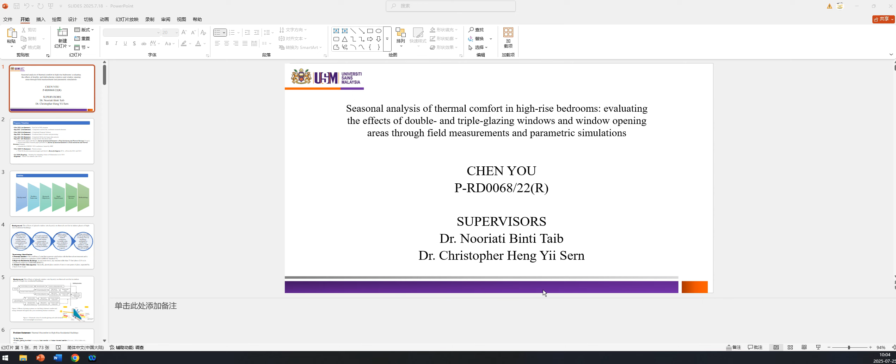Should I start with chapter one sequentially? What do you have today? Because the last time I requested, I want to see your results and analysis. Do you have that in your slides or not? Yes, I have all contents, chapter one to chapter five, in the slides. Okay. Maybe we can have a look at that. I think you amended a bit on your objective. Perhaps we can start from the objective then. The rest, I think we have to go through the thesis rather than the slides at this point.

Can we just look at your timeline at the moment? Can we go back? This is March 22 when you actually registered, right? Yeah. Okay. I think you're quite in good time. This is like your third year, right? It's my fourth year actually, seventh semester. Okay. Can you go next? Go to your revised objectives.

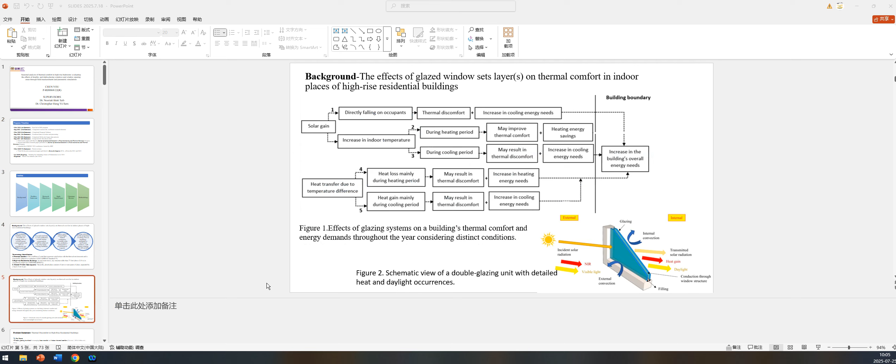First is to investigate the thermal comfort performance of different rooms, and the second one is to use simulation software to improve the multi-scenario thermal performance with window glazing type, shading coefficient and the window opening area. And the last one is to quantify the impact of the window opening area on the SHG and the CEV under different glazing window conditions.

Okay. I think that's quite clear. Dr. Chris, do you have any comment? I've gone through the objectives. I think it has been revised. I just have a question on the word empirical. I do not know if it is appropriate to use here. I was thinking to measure and compare instead of using empirical. I do not know whether this comment is legit or not.

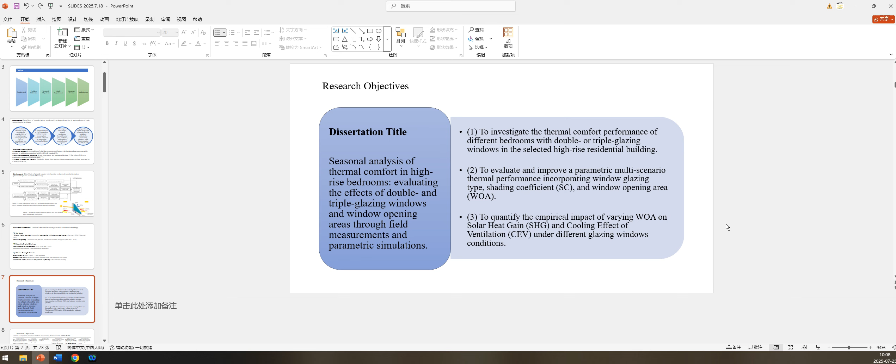The reading. Yeah, the reading. Yeah, the data for number three. Is it in percentage? It's reading, right? Yeah. Ah, okay. I think it's okay, Dr. Chris. This one to maintain. Yeah, okay, all right.

Okay, can we go to the next one? It's okay. I see this one. I think this is quite easy for us to understand. But I don't know whether you need both for research objective and research question. If we can have just one table to summarize this? Is that okay, Chen You?

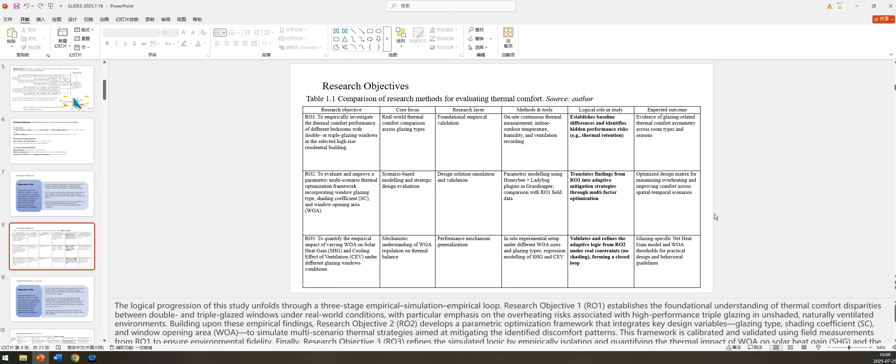Because there's not much difference, right? They're similar. Can we just simplify? Because usually we don't have it, but I can understand if you want to make it easy for the reader to understand your work, it's okay, but I don't think you need two tables to describe. Okay. All right. Can we go to the next one?

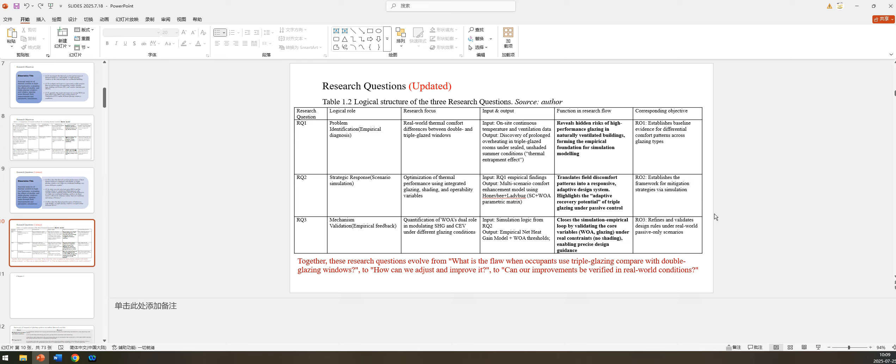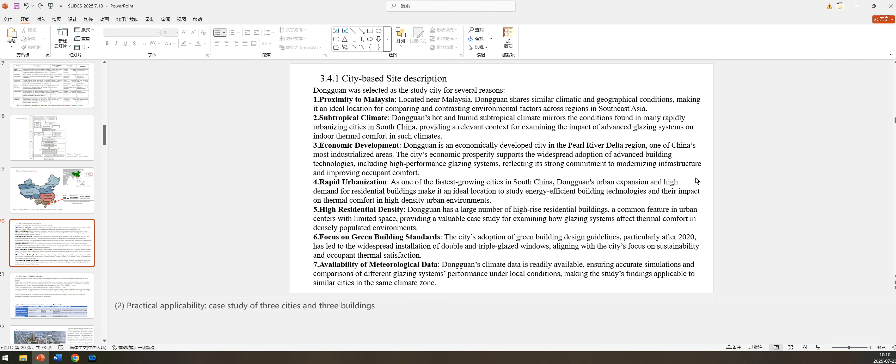Can you jump straight to method? We asked you, I recall, part of the method was to justify why you chose these seven locations. Are there any criteria or any components that you are referring to? I think you have it, but I'm not sure where exactly. Can we just discuss this? It's like reverse engineering, why these seven.

This is the criteria for building selection and this is the room justification. Seven rooms were selected from the high-rise building because they met these conditions, because of the different types and orientations. And in every room, or every house, they have to have different glazing types.

This one is not simulated, right? Is this for objective number one, number two, or number three? This is for the field measurements, objectives one and three. So it's not simulation, it is measured, right? Yes. Okay.

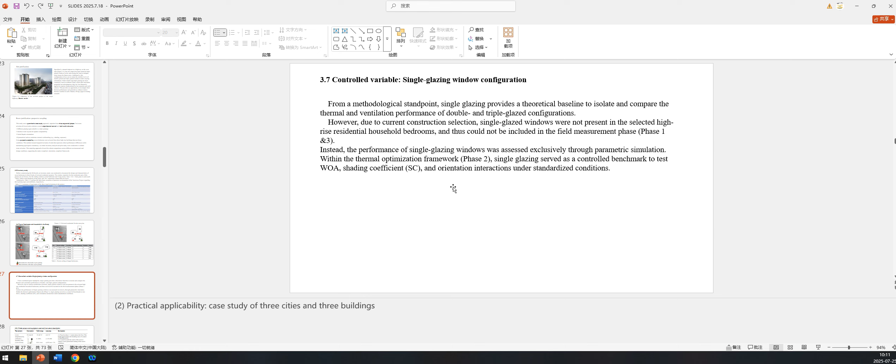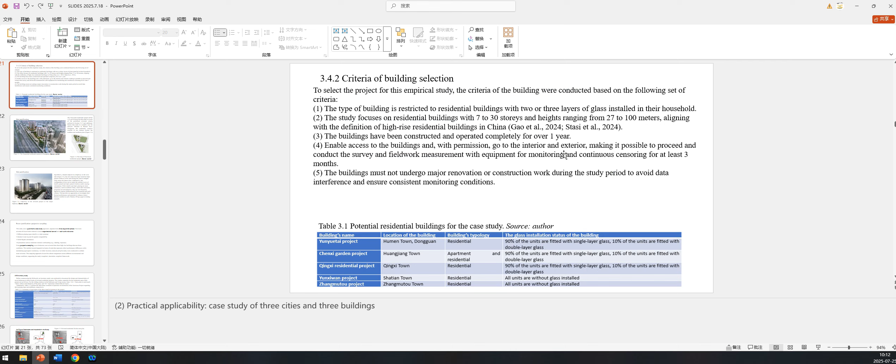It's kind of difficult. What I'm saying is, when I ask you for the criteria, can you just have it in one page? I know there's a lot to explain, but can you simplify it and summarize it first? Because looking at this, I'm not sure which is which. There's so many things going on here.

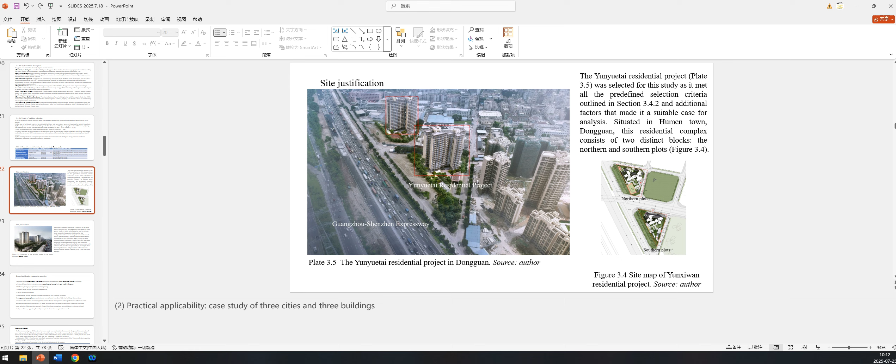The scope is from the city to the building and then to the room, from the big and narrowing down to the room. So I will simplify this justification in one page. Okay. When you present, it's very important. Varied facade orientation.

When you say varied facade orientation, which orientation are you choosing? It's random. Can you explain that? The orientation, these two are the same orientation, south orientation, and this one is for the east and northern orientation.

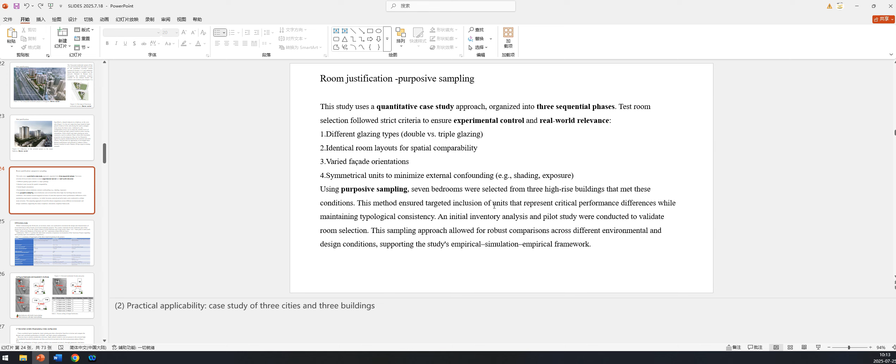What I'm saying is, when you go back to the page just now, you might want to detail it out in that sentence. When you say varied facade orientation, just have it in a column: Roman number one, east facade, Roman number two, west facade. So we know how many facades and orientations are involved. Can you understand? Yes, I have mentioned it in my manuscript.

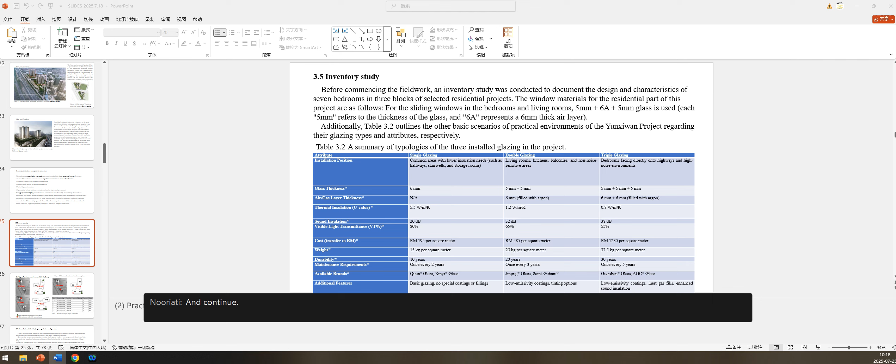Sorry, okay, doctor. Chenyu, okay, you can continue. Okay, sorry, I had a visitor just now in my room.

So last meeting I was advised to introduce control variables, so this time I added the single glazing configuration as a control variable, single glazing compared to the triple and the double. However, due to the current construction selection, single glazing is not present in the selected bedrooms, and thus couldn't be included in the field measurement phase.

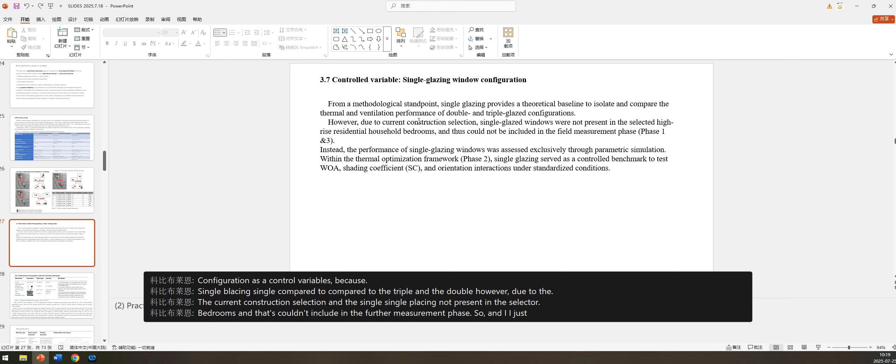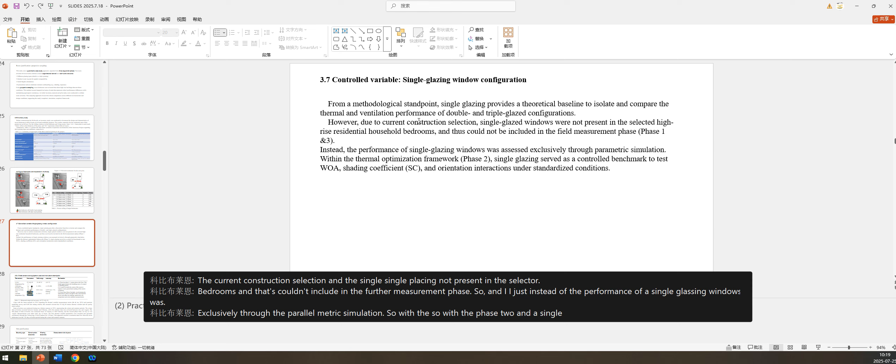So instead, the performance of single glazing windows was assessed exclusively through the parametric simulation. So in phase two, single glazing serves as a control benchmark to test the open area, SC and orientation under the different conditions.

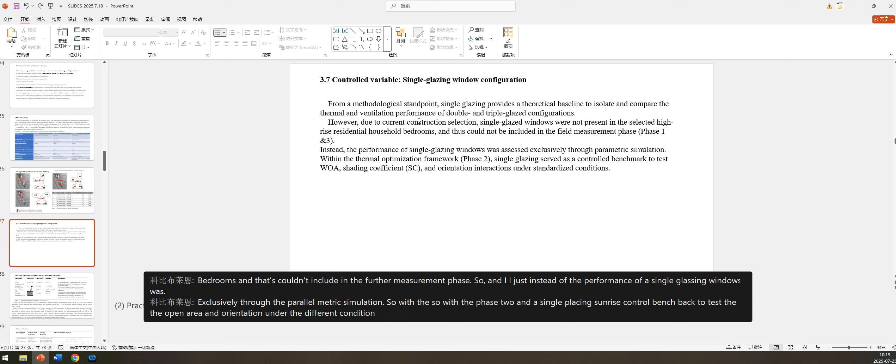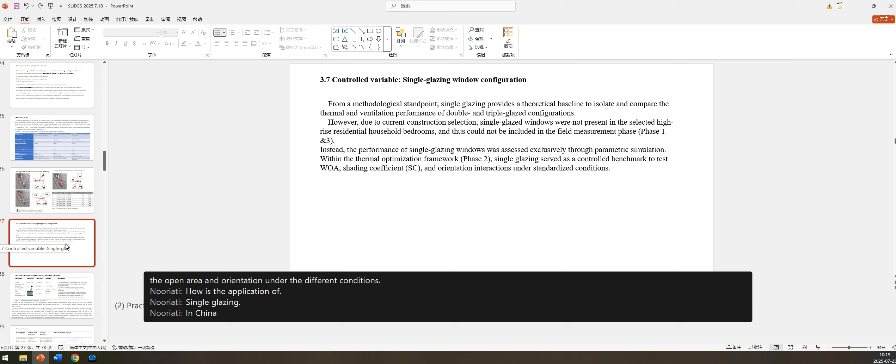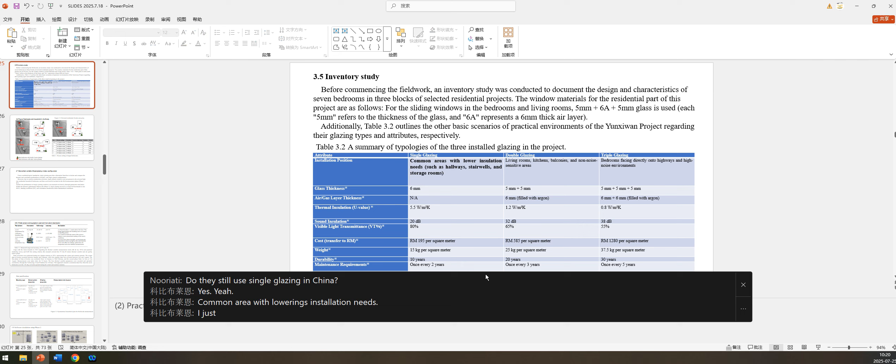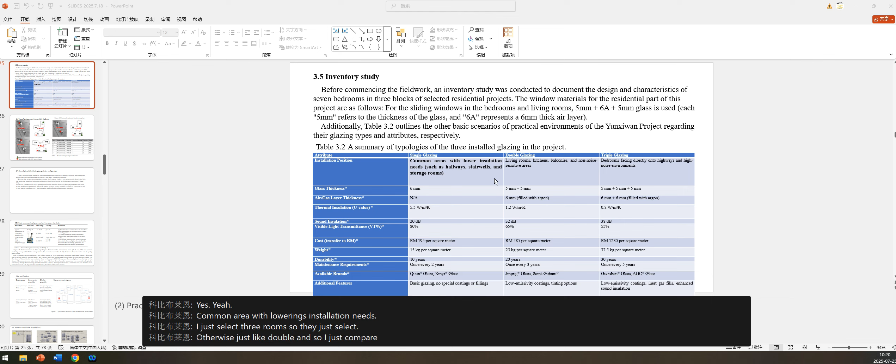How is the application of single glazing in China? Because I know the seasons are different from here. Do they still use single glazing in China? Common, yeah, single is common in common areas with lower insulation needs. But I just selected three bedrooms, so they just select advanced glazing, like double and triple glazing. So I just compare the single glazing with simulation. So that's the way it goes.

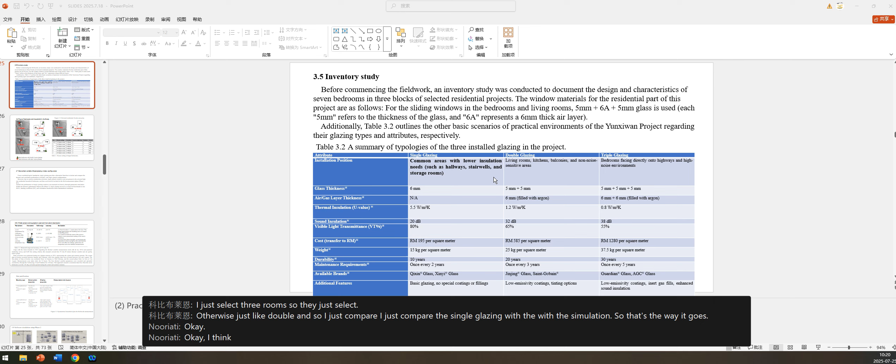Okay. I think can we move to the next one? Go to your results. Chen Yu, it's important during the Viva later when you talk about your method, it has to be clear on the steps, the step by step that you actually do. Like here in this case, your objective number one, is it through literature or did you measure for number one?

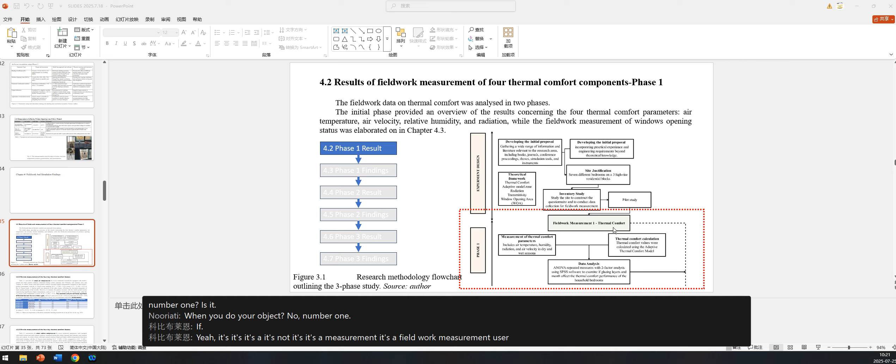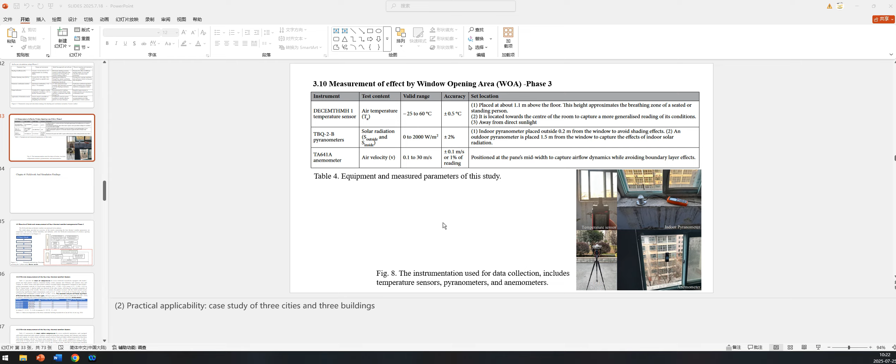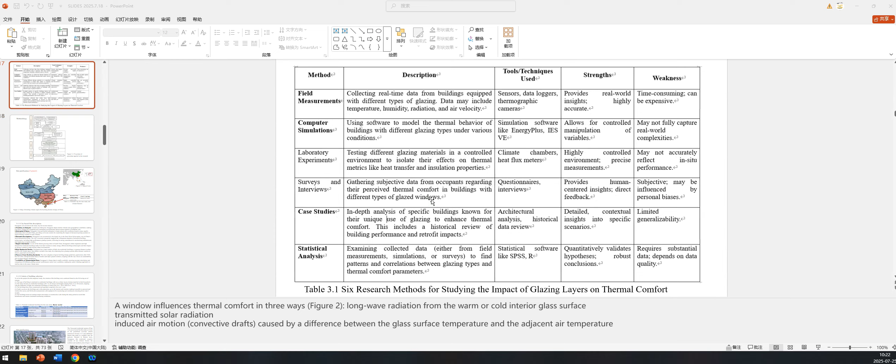Do you have that in your slide for research method, like a step by step? Yes, I have. Okay, can you zoom in a bit? Okay, this is a sort of flow chart of the research. For example, your phase one: measurement of thermal comfort parameter, thermal comfort calculation, data analysis. It does not show clearly the procedures. Do you understand what I meant by procedures?

Means like what are the tools involved, and if you are taking a certain measurement, how many times do you take it? So I have to check in your thesis whether that is included. Those processes are very important. This figure 3.1 is just to understand your flow chart of the three-phase study. When I talk about research method, for each phase we need to be clear on the processes. Do you understand? Yes, yes. So it needs more details.

Drawn out clearly. You have those probes and whatnot, but because you have three phases, there are many things you are doing at one time, so it has to be clear. Probably divide into phase one, what are the steps, phase two, and then phase three. I think the writing is here, but when you present, you don't have a long time, it's a very short window. So you need to be able to simplify the processes.

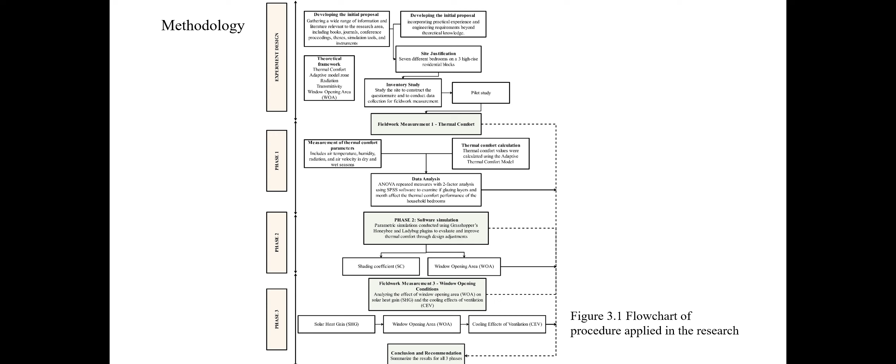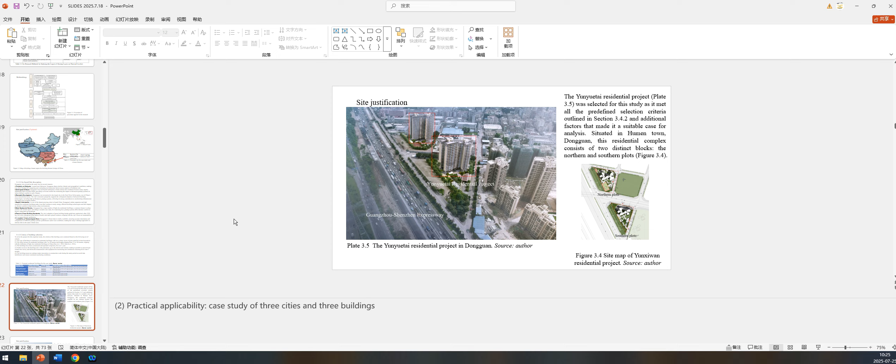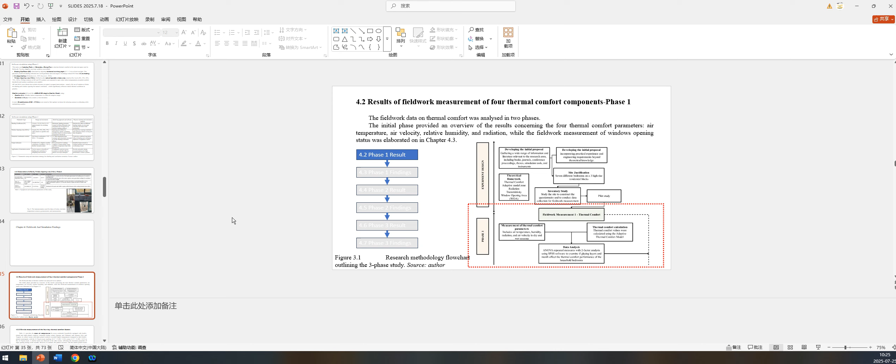I don't want to talk much about that this time, because what I want to see today is your results and findings, since we have not come to the stage where you present them. So I believe you should look at the method points I mentioned. Now can we go to results and findings? You can present them. I was just scrolling your method. Your method is very long. How many pages is your method?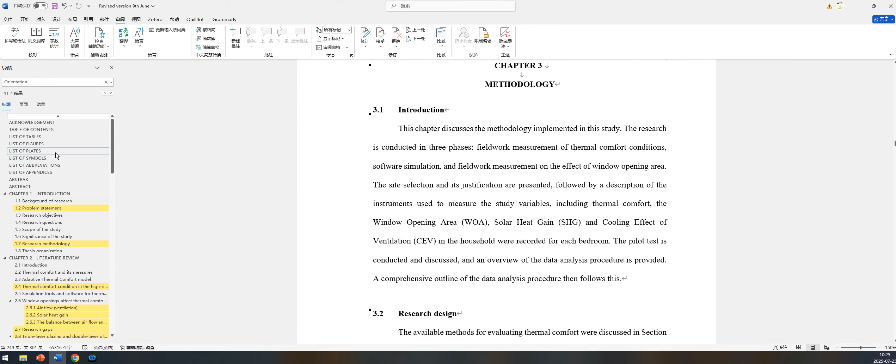I will count about how. Yeah, it's a lot. It's a lot. I think it is very much. I've been scrolling and haven't stopped scrolling. Okay, so you must be able to simplify.

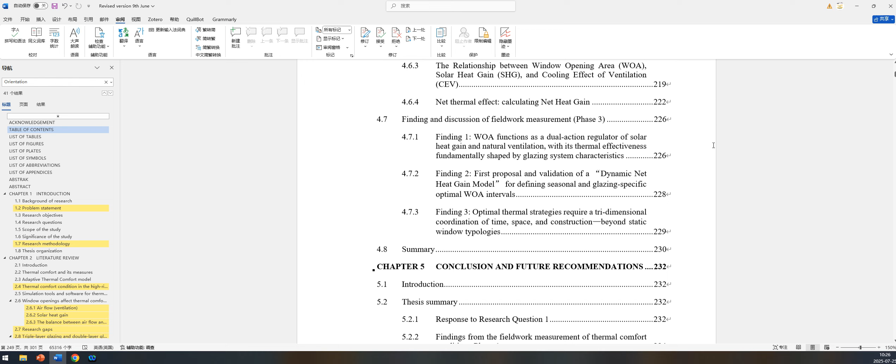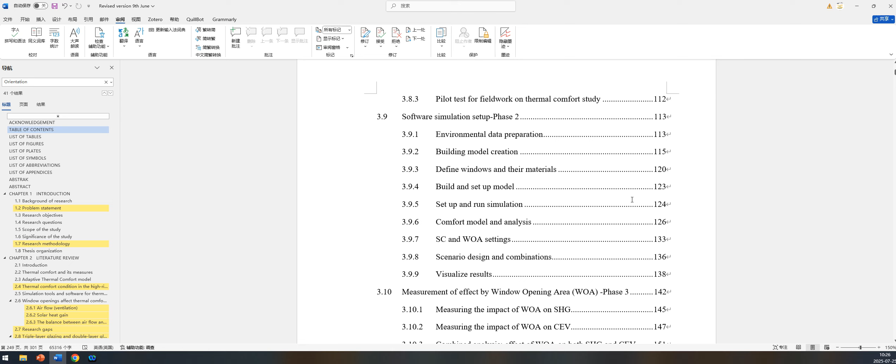Okay. Especially when using the softwares and all that, you must be able to differentiate what the author has to discuss on how you do the process and what the equipment can do. You don't have to present what the equipment can do or how to do it from the equipment. Do you understand or not? So that one has to be clear. Yes, I see.

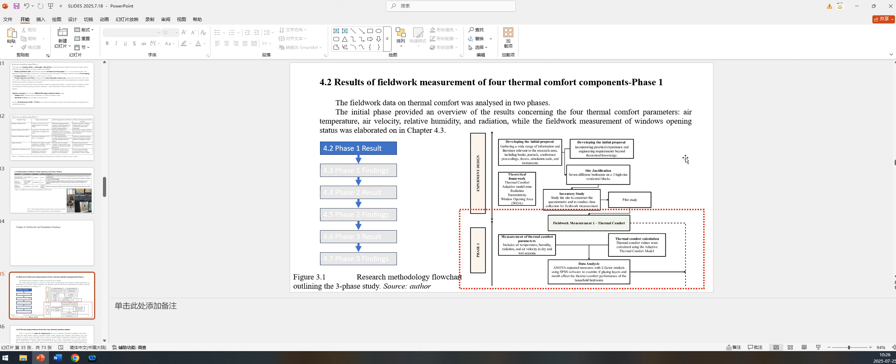Okay. Now, can we go to chapter 4? Can you discuss your results now? Okay. Chapter 4 is field work measurement and simulation findings, and I will follow this step. There are three phases, and I present the results and the findings of each phase, up to the last phase. Follow this step.

So the first one is phase 1, and this is the result of a field measurement of 4 thermal components, the mean air temperature of these households. This is the on-site measurement of the mean air temperature, and the statistical analysis confirmed the significant differences between the two window types.

Okay, I just need to interject. Can you go back to the previous slide? When you meant the differences between dry and wet season, you need to be focused here. For China, how do you divide their seasons? Don't they have 4 distinct seasons? Yes. So which is spring, summer, autumn, and all that, right? Yeah, correct.

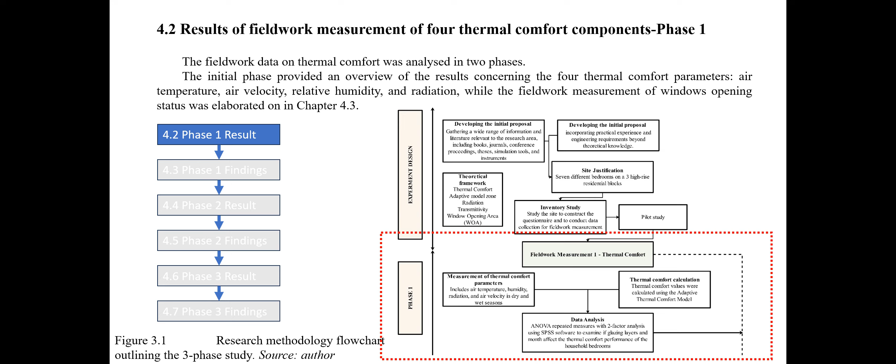So why, when you look at measurement of thermal comfort parameters, do you divide them into dry and wet season? Which is which in your table just now? That's why in your method, when you present step by step, one of the most important things is to discuss your data collection. For phase one, how do you conduct your data collection? How many times a day? What is the whole duration? And if it's four seasons, you have to mention four seasons. So I'm not sure why the slide before compares two seasons.

Do you go through all four seasons? I just want to compare winter and summer. So winter and summer, two seasons which you cannot categorize into wet and dry, right? Because winter can also be... I'm not sure about this. Dr. Chris, I don't think you can categorize them into wet and dry season. You just use winter and summer, I think. Yep. Okay. Can you please take note of that? Yeah.

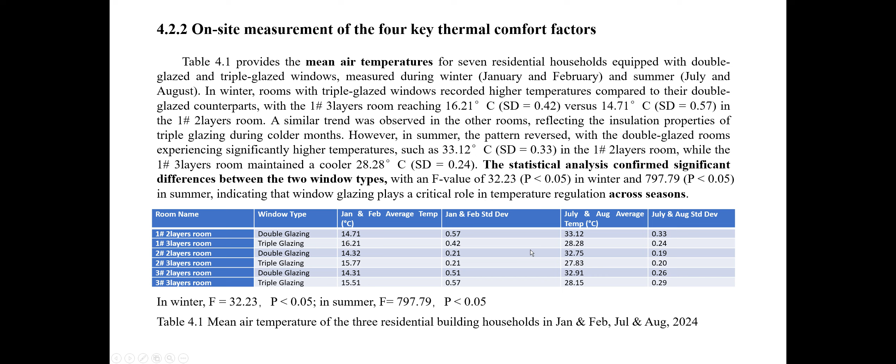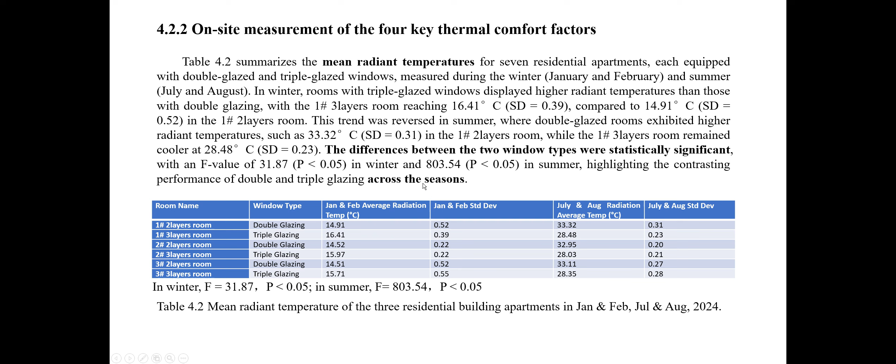I compare the four key thermal comfort components. The second one is the mean radiant temperature of these apartments. I draw from the table that the difference between the two window types was statistically significant, highlighting the performance of triple glazing across the seasons. The next one is relative humidity, and the statistical analysis also confirmed this difference was significant, with an F value of 22.

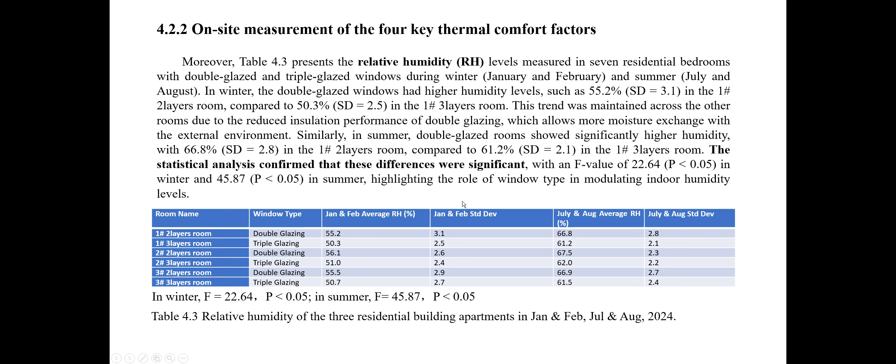The last one is air velocity. It is also a vital component for thermal comfort. Although the windows were closed, the velocity was not zero due to factors like air infiltration through small gaps and natural convection driven by temperature differences in the room.

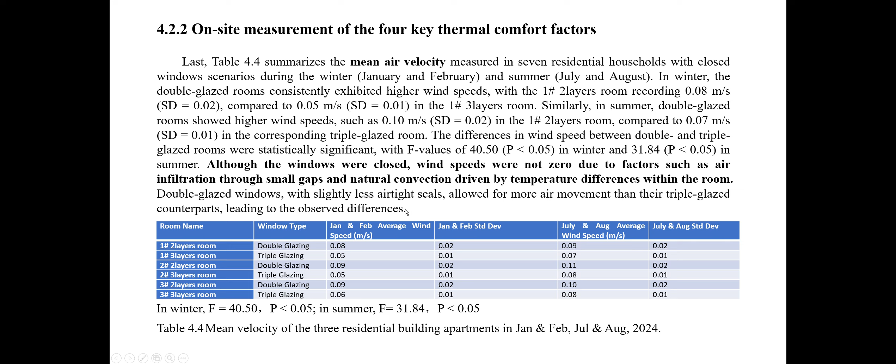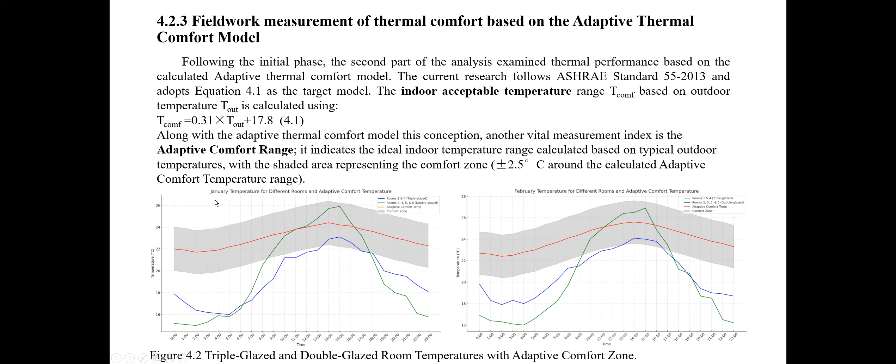Following the initial phase, the second part is the performance based on the calculated adaptive thermal comfort model. These two figures show the triple glazing and double glazing indoor temperature with the adaptive comfort zone. The red line is the adaptive comfort temperature calculated by this equation, and the gray area is the adaptive comfort range around the calculated comfort temperature.

So the next one, the last picture, is a comparison about the winter, January and February, and these two photos are about summer, July and August. And I just want to show both double and triple glazing exceed the adaptive comfort range during the peak of these two months, indicating that passive cooling through the glazing alone is not enough under peak summer conditions.

So following this comparison, I wanted to conduct the ANOVA test to examine the glazing type and the seasonal variation influence and other variables. This method was chosen because the study involved collecting repeated thermal comfort measurements across different times, and this ANOVA is particularly suitable for this data structure, and it allows for the analysis of within-subjects over time while controlling for

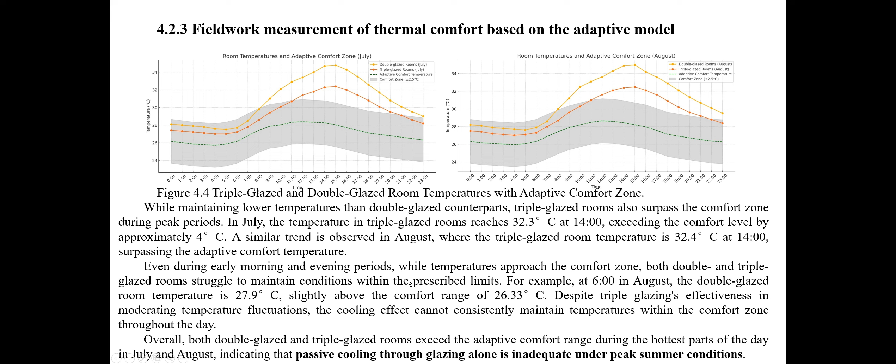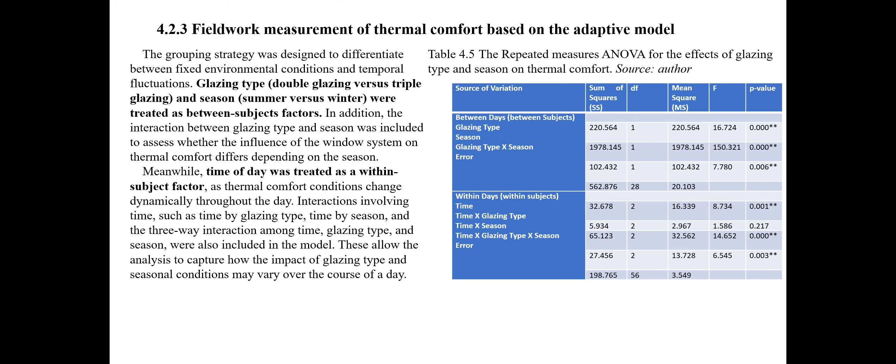Now what you showed here is just telling us what is within subject, what is between subject. We want to know what the conclusion is. Do you understand? For example here, you said seasonal differences were highly significant. Let me ask you, if this is done in a tropical climate, probably you cannot see the differences between dry and wet season, because it's very similar. Although we have rain, the temperature can still be quite similar, between 30 to 34, for example.

During the rainy season the differences are very small. So this kind of analysis is good for a tropical country. But if I'm going to have seasonal differences significant, before I even conduct this study, I would be able to say there must be a significant difference between summer and winter, right? Or is it different? I'm not sure. So winter in China, is it really winter? There's snow, isn't it? Or not necessarily. Can you tell me about it?

Because the site I chose is located in a subtropical area, it's a little similar to Penang. There's not too much difference. Okay. So it has a similar climate, is it? But when you say winter, is there snow in the subtropical climate? There's no snow. I haven't seen snow. Okay, all right.

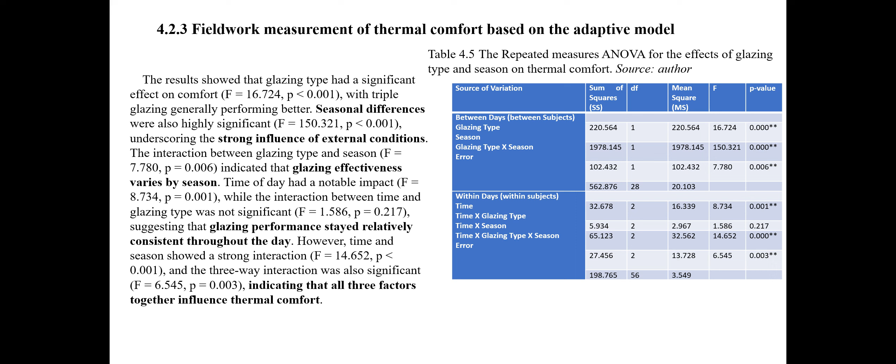Can you just check from your data, for example, in winter which is the most effective glazing, and in summer which is the most effective glazing, so that you can conclude from here? Because I believe you can get that from here, but you didn't. Okay. All right, can we go to the next one?

Dr. Chris, can you please add in when you feel the need to? I'm just going through quickly, yeah? Sure.

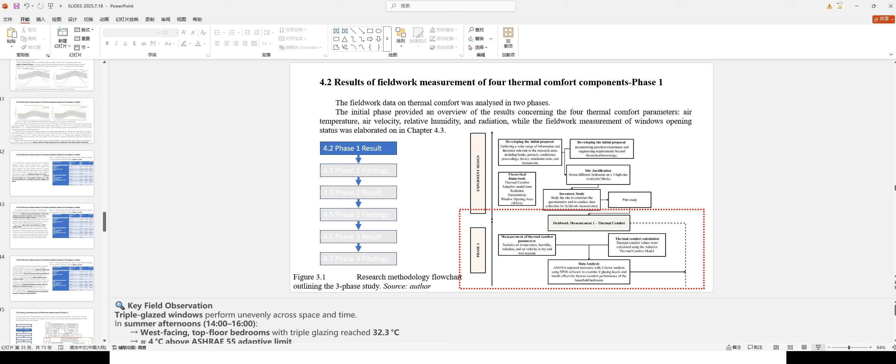Okay, all right. What is this? Discomfort. This is a finding from phase 1. Okay. So how did you actually do this? Is this through observation or from your result? Sorry? Actually, this is my summary of the 3 phase findings. Every phase I have 3 findings. Okay, present to us.

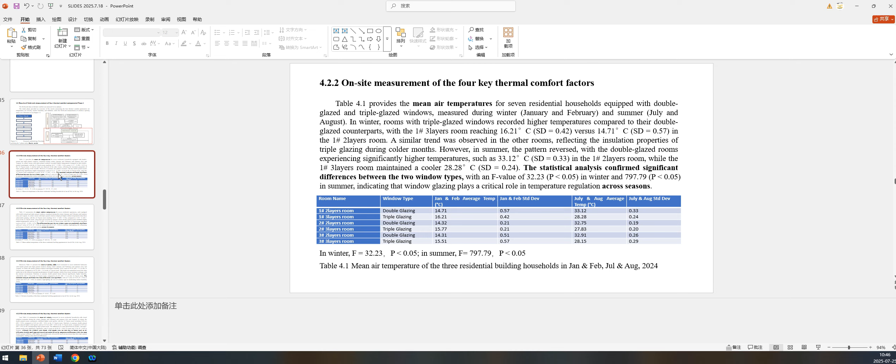That is your finding just now, summary of findings. Okay. Right, present. The first finding of phase 1 is that triple glazing bedrooms have prolonged thermal discomfort in summer. It's against common sense, but the triple glazing bedrooms exhibit a more persistent overheating trend, and the overheating exceeds the comfort zone throughout the day. It can be seen from this table.

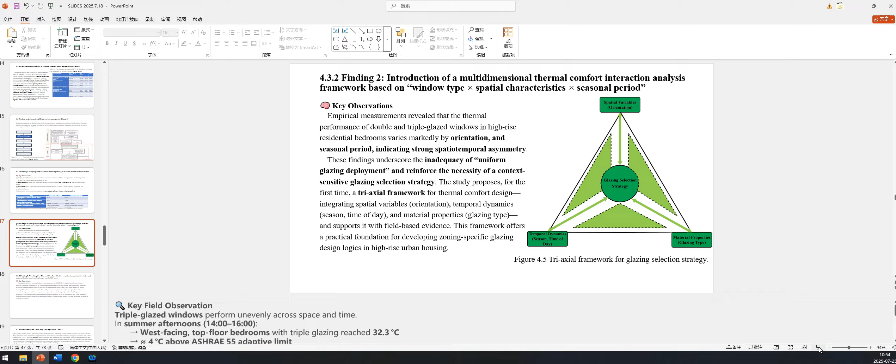Third one, third one is about the thermal comfort model.

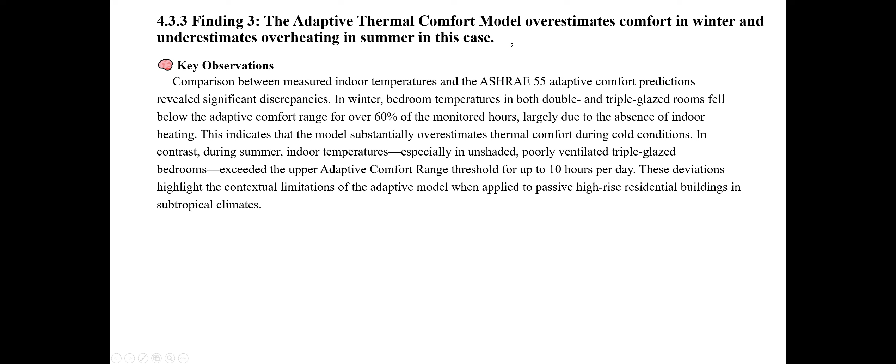Okay, okay. Can you speed up a little bit? I have a meeting at 11 something. Okay, okay. I'm so sorry. The dean is asking. Okay. Hurry up a bit.

It's not phase 2. So this is the second phase, the comparison across. Okay. My question is, for you to conduct your phase 2, do you need any result from phase 1? Do you take any findings from phase 1 to then test on your phase 2? Yes. Yes. What is it?

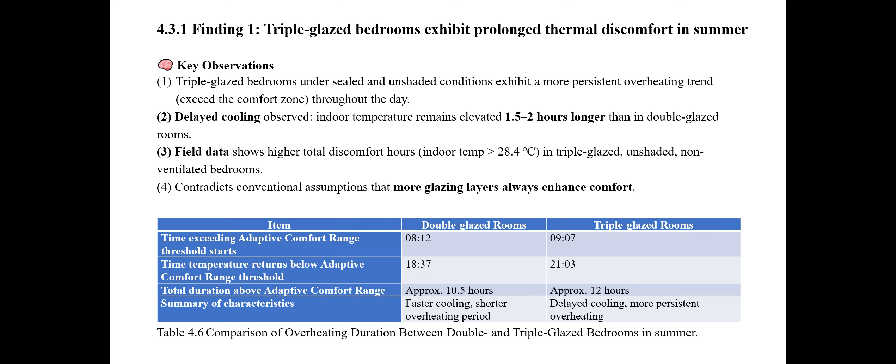Phase 1, I just fixed the problem of the triple glazing, because they have more discomfort time. So I want to solve this problem in this case. So I introduce this shading and opening area, these variables, to mitigate this discomfort time.

Okay, my question is, when you say window opening area, is it something that you control manually, or how is it? Yeah, controlled by myself. Okay. So that means in the first phase, it does not involve SC and WOA at all. Yes means what? It does not involve, or does it involve? In phase 1, no. There is no SC and no opening at all. Just measuring the fully closed windows.

All right. Can you please explain how you come about this one? So this is where it's very important, Chen Yu, to conclude the point that I mentioned to you for phase 1. I also realize you may not need what I asked you just now, because you are actually using adaptive temperature, right? And so you are able to see when is the longest and when is the shortest, but you must clearly highlight it before you go to phase 2.

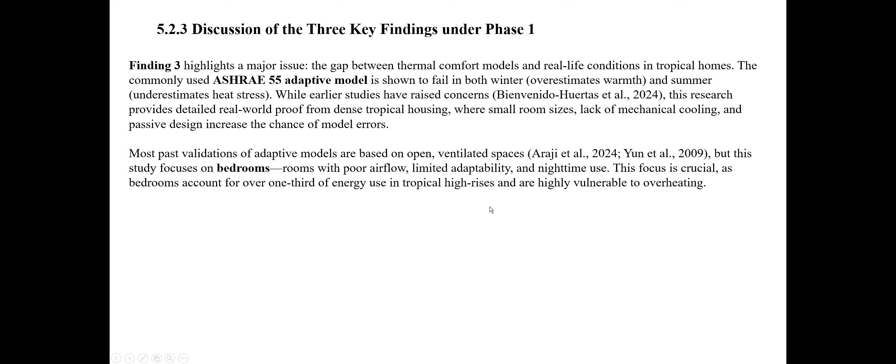How do you go about this one? Tell us. So the triple glazing windows result in less thermal comfort, which is what I wanted to solve and modify. This is the comfort hours, generated from the simulation software, across 5 different SC and 5 different WOA. So I did a combination test for this experiment.

Okay. So when you say comfort hours, all of these are considered comfort, right? Even at SC1, WOA 0%, 622 hours, is it considered comfort or not? These 2 months have more than 1,000 total hours. So the comfort hours account for 600 out of the 1,400 hours. I mean, the different numbers of comfort hours among... How do I put it?

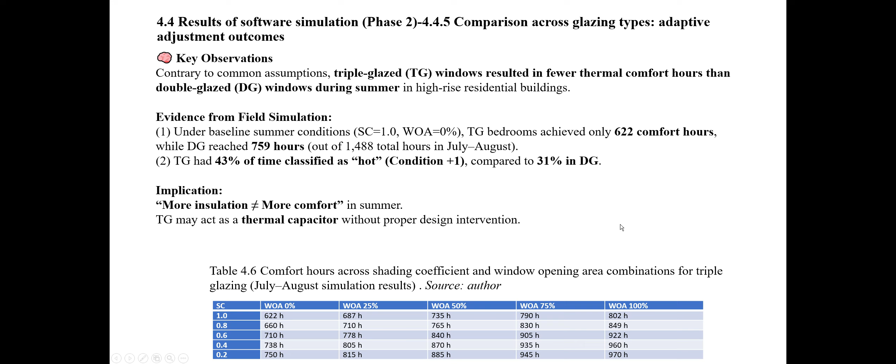And as for the WOA, I chose this because when we sleep in the daytime, we may open the window wide to welcome the air, and then ventilation is better. So I selected these two parameters because I worked in this area for a long time, and I investigated so many residents. They told me they have...

Okay, Chen Yu, maybe you can add some statements from previous studies to support why you chose that. We know that you're the expert, but you cannot claim yourself as an expert here. So you have to support your study with findings. Okay? All right? Okay.

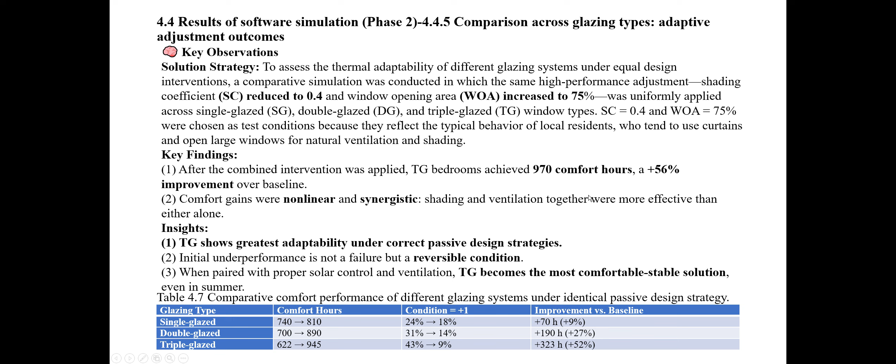So this finding is: triple glazing has the highest adaptive recovery potential despite the poor baseline performance. Under the baseline thermal conditions, especially with no shading and no opening area, triple glazing showed the worst thermal comfort, about 622 comfort hours, and in overheating.

Compared to the comparative comfort performance of different glazing under the adjustment of design strategy, the triple glazing improved the most. This reveals triple glazing is not inherently unsuitable for warm climates, but it's highly sensitive to the boundary conditions. With proper ventilation and shading, it becomes the best window of these three types for ventilation or thermal satisfaction.

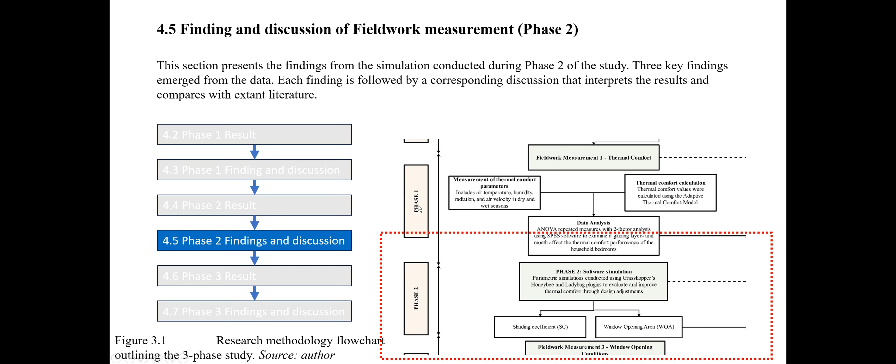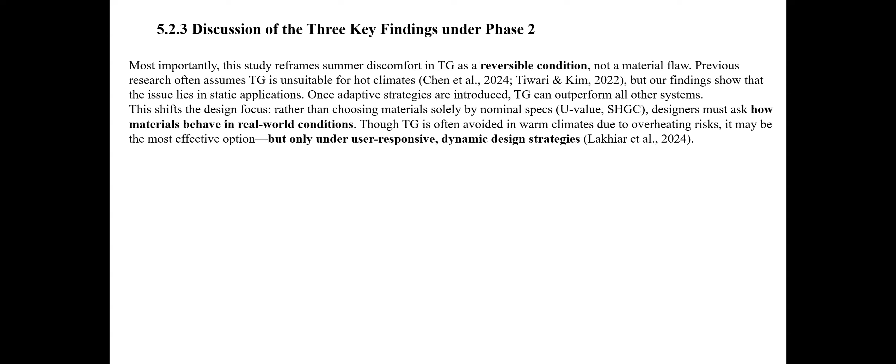Okay, all right. Phase 2, you are looking at this. When you use Grasshopper, this is simulated, right? Okay. When you use Grasshopper, it's very dynamic, so sometimes you get to see the modification in your studies. But I can't see that because everything is just text and numbers. I feel your presentation is lacking graphic images, which I think is very important, because just now you showed how many percent opening and whatnot, right?

But sometimes I wonder, without parametric simulation such as Grasshopper, can you still come up with this kind of data for simulation? No. If we don't use simulation software, we can't see the potential of the triple glazing. It has the best thermal recovery among these three types of window. Someone might guess a single glazing room has more potential for thermal recovery.

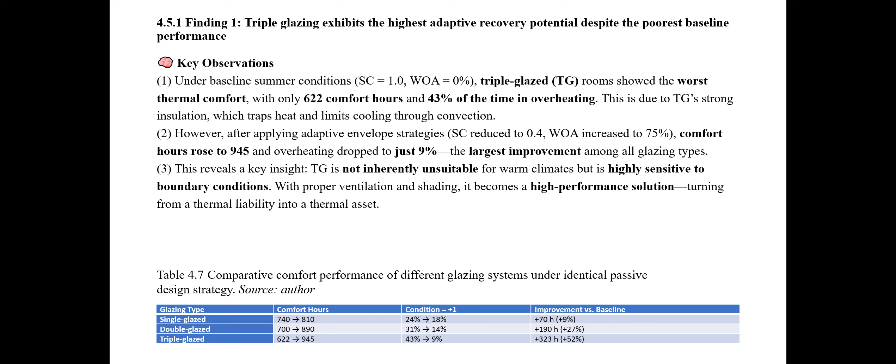Are there any graphs or charts you showed earlier? Can I have a look? For phase 2, I didn't put any figures or graphs here, it's just tables. Maybe I can add some figures later. Okay. Can you just proceed to the third one?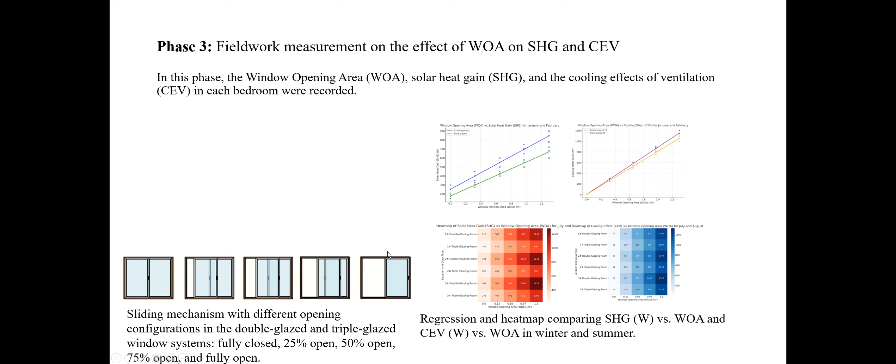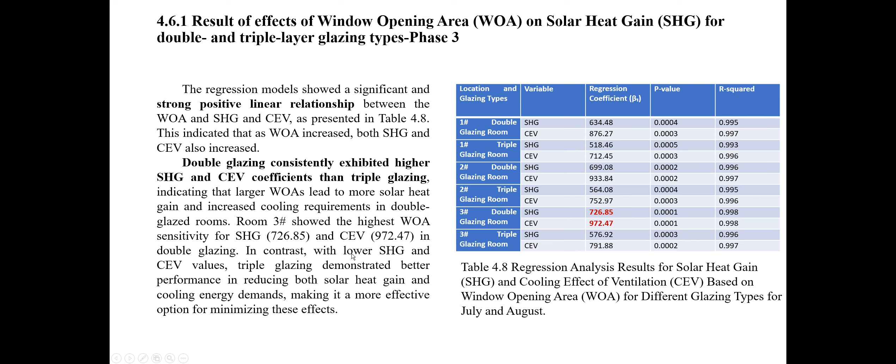Double glazing consistently exhibits higher SHG and CEV coefficients than triple glazing. It can be seen here: this is double glazing, this is triple glazing. It consistently exhibits higher SHG and coefficients than triple glazing. Okay. Net thermal effect, SHG.

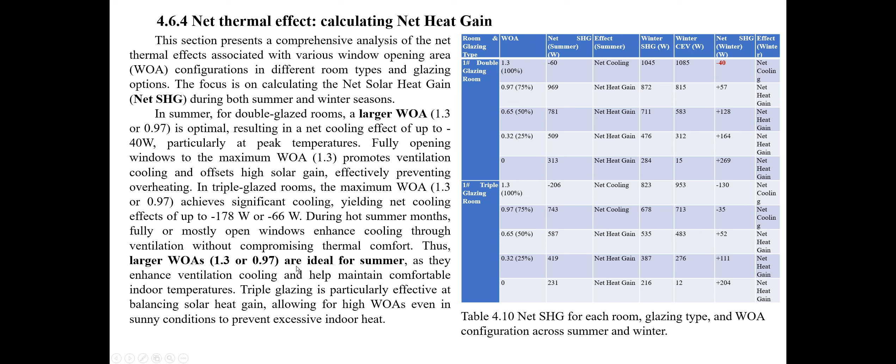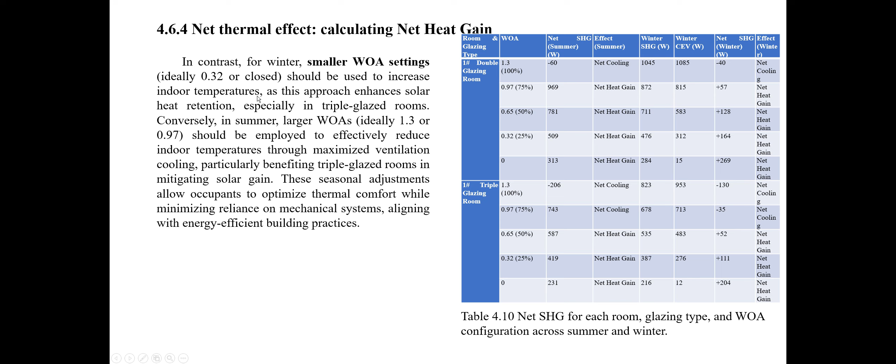And in contrast, for winter, smaller opening area settings should be used to increase the indoor temperature. So this finding from phase 3 is finding one: WOA functions as a dual action regulator of SHG and CEV. So they can regulate both SHG and CEV. This study shows the increase of the WOA both on SHG and CEV.

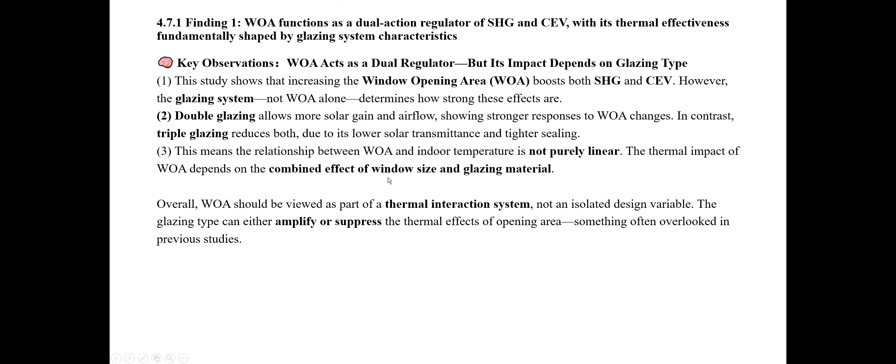However, double glazing allows more solar gain, and in contrast, triple glazing reduces both. So this means the relation between the WOA and indoor temperature is not purely linear. The thermal impact of WOA depends on the combined effect of window size and glazing material.

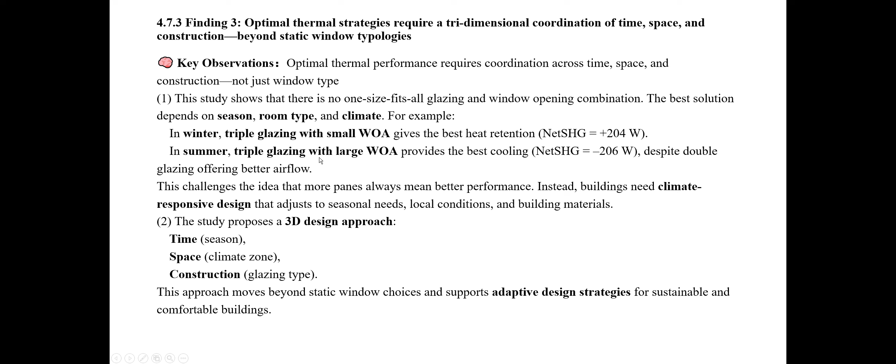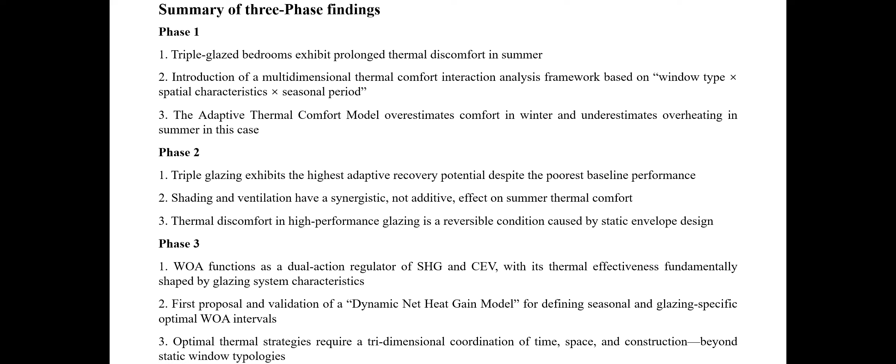So the third finding is optimal thermal strategy requires a triple dimension of time, space, and construction. So this study proposed a 3D design approach about time, space and construction. Construction refers to the glazing type. So in winter, the triple glazing with small WOA gives the best heat retention, and in summer, the triple glazing with a large open area provides the best cooling. So that's all about my three findings.

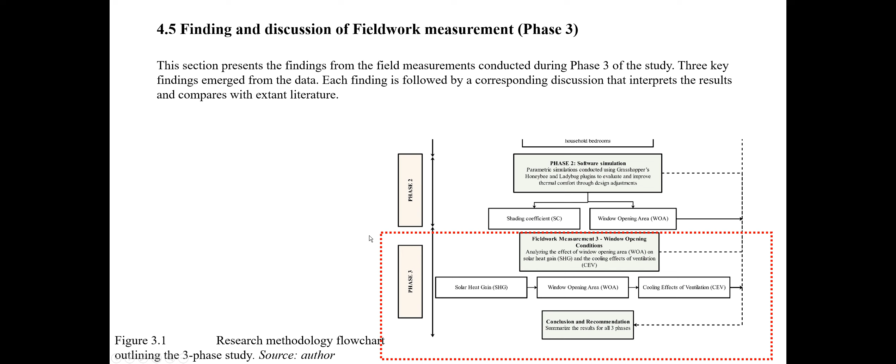Okay, Chen Yu, in your results, probably we can look at how you can make your presentation of the data clearer. Either we can put it in the form of graphs, especially the important findings. I think that's very important because if not, we cannot see the relationship. Because sometimes you are comparing two things, like the season and the glazing, right?

When you talk about regression and all that, you need to see how best the data is presented. Okay, but I have no issues in terms of your conclusions for number 2 and number 3. The same things are there. It's just that I feel graphically it can be better. Because usually when I choose a panel for architecture, we will choose a panel from architecture for your case. So I think it will help the presentation. Okay. So that is something I will leave you to work on

after this session. Okay. One thing that I want to ask you: you have findings, right? In terms of the novelty of your research, I think this is very important when we do a PhD. We want to see how much knowledge is contributed to the body of knowledge, basically, right? What can you say in terms of this?

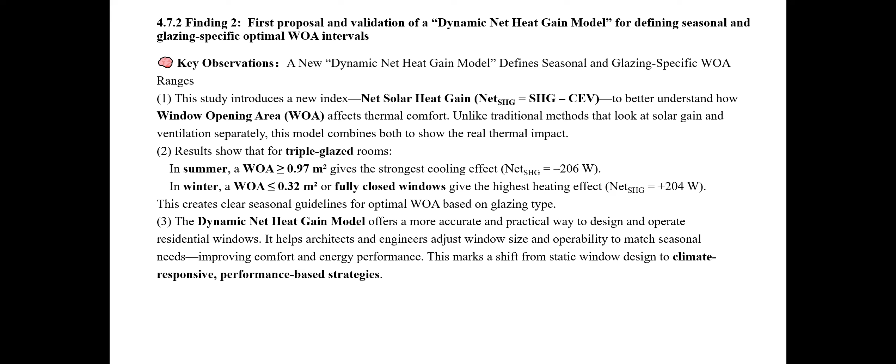Okay. So I just want to say the summary reflects the novelty, the key findings. So this study investigated the performance of window glazing type, SC and WOA through the three phases, and using high resolution data and modeling, it challenged the conventional beliefs about high performance glazing and introduced a new framework for adaptive building envelopes in high density residential areas.

So the key findings: triple glazing, often considered superior insulation, can underperform in hot and sealed conditions. However, with proper shading and opening area, it can enhance the thermal performance, demonstrating high adaptive potential. And opening area functions as a dual regulator of heat gain and ventilation, varying across seasons. In summer, a large open area can reduce heat gain, while in winter it helps heat retention. So I think this is the main novelty of my research.